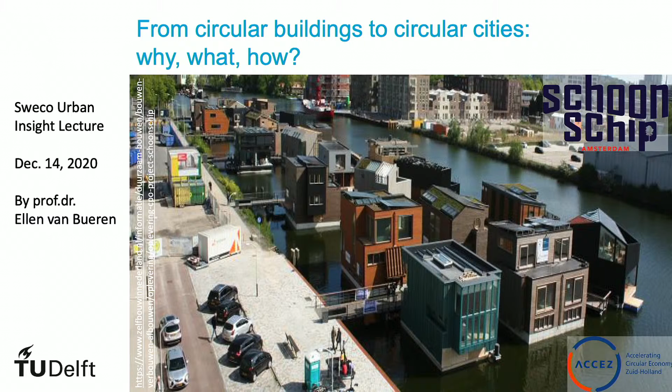Well, this is a very nice example, and I would urge you to look the project up at the website, where they have much more information on it. It is a very nice example of how you can make cities more circular from a very bottom-up level as well, and to see what it could offer to us. So it's not just the buildings, but also the community involved. But let me take you through the slides and see where we get this hour.

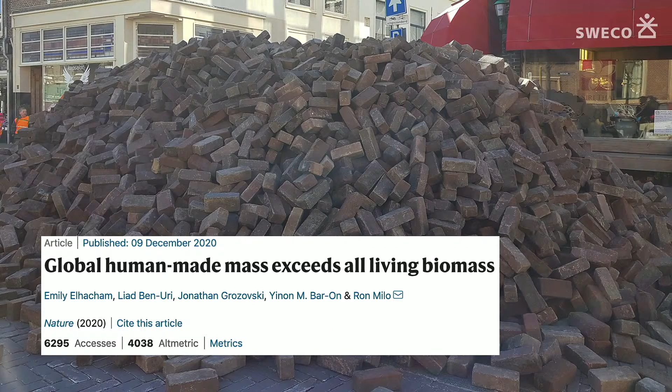I will tell you more first about why. Why do we need to develop our cities in a circular way? Well, I guess the Sweco report also mentioned it already, and I think climate change is happening all around us. I guess you're quite familiar with the reasons why we need to become circular. But nevertheless, I want to share with you this recent publication of last week, stating that global human-made mass exceeds all living biomass.

Another fact made by humankind, another milestone achieved, you could say. And it's really incredible all the materials that we extract from our earth and that we produce, and that we perhaps also do not use in the most sustainable and responsible way. After all, we only have one planet, and we should be careful with the planet, with the resources that are there and the living climate that we need as humankind.

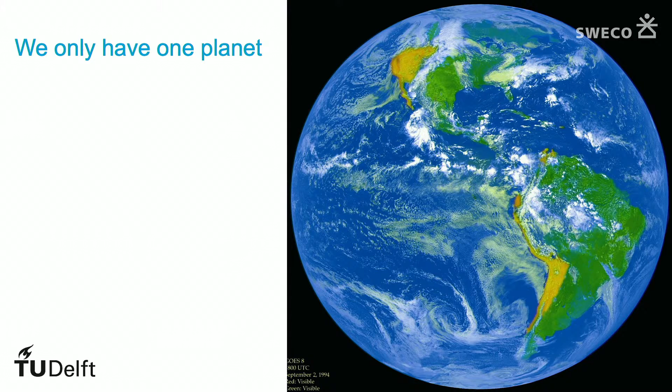Cities are of particular interest to people, policymakers, companies interested in making our planet more sustainable, because they are sources and sinks of pollution, of material use. By developing cities you need a lot of materials, but also for the operation and maintenance, of course, you need a lot of materials and resources as well.

At the same time, they are huge sinks of material use, since lots of the materials that we extracted and manufactured and produced into building products and buildings and infrastructures are stored in there. So whatever we have used, you could consider it as a sink, as a potential mine of the future as well, perhaps for reuse.

There was also this briefing by the European Environment Agency on construction and demolition waste. It is one of the biggest waste producing sectors as well. So we need to be really careful about what we use and whether we just dispose of it when we

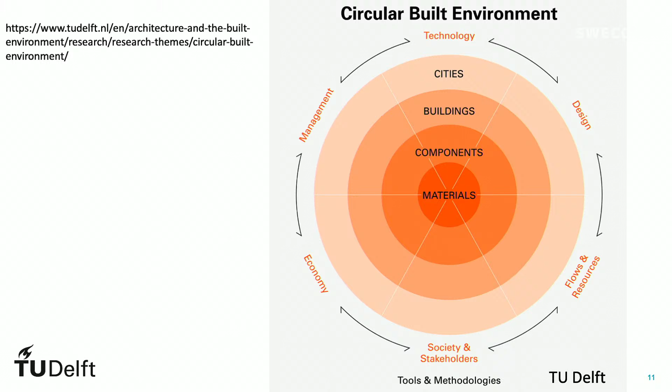But what makes it so complex? Because this graph, even though it has many components, it seems quite accessible. But if you dive into it in more detail, then you see that closing loops at higher scales is more complex than at lower scales. There will be more actors involved, the definitions become more vague, more ambiguous, and it will be more challenging to see what is a good measure to take, how to really make sure that I close the loop.

And then you come to questions: okay, on what level should I close it? Should it be on the material level, and that material, should it be embodied already in a product, or what if it's embodied in a building? Should I then try to save and reuse the building at all costs, or should I do it at the component level? So those kind of questions become apparent then.

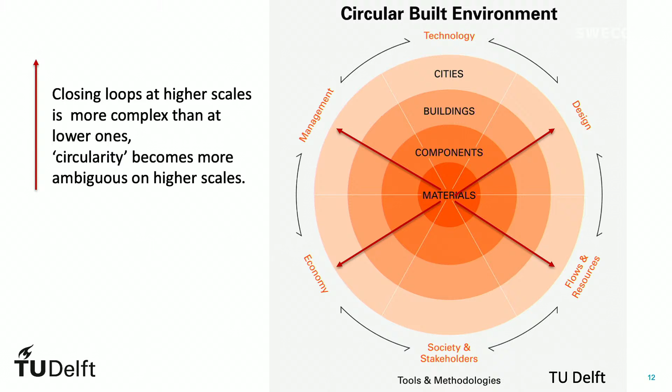And then you also see that the higher up the scale you go, the more and more actors will be involved, coming from different sectors and coming from the public and the private sector as well. So it will be a very difficult setting to organize and coordinate, and such coordination mechanisms are usually absent.

So now when we think of, well, why is it so challenging to have this circular built environment, even though it sounds so logical? Then there are two fundamentally different approaches to circularity that we can identify at the moment. And it is important to understand these different approaches, because there are two different discourses, all preferring different solutions.

And that is also one of the messages I want to give to you in this lecture: having the debate about how these different approaches match and can fit into each other is something that is very important to learn about together, because there are no known solutions yet, but together we should try and come to solutions. But I'll introduce these different approaches to circularity.

On my slide, on the left-hand side, you see there is one approach that is about the closing of resource loops, and it is especially focused on supply chains, and supply chains have become, in our last century, footloose. So it is especially about cleaning and greening supply chains and making them more efficient and closing the loop at that level. And then you really think in terms of products and services that come along that help to close this loop.

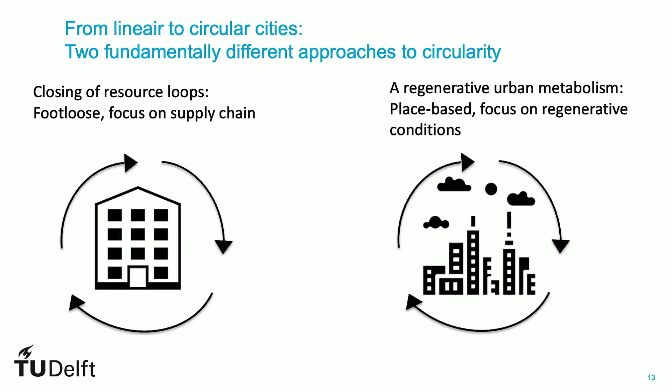And that focuses really on the regenerative conditions of cities. So how can you make sure that a city can sustain itself in the future? How can it reproduce itself as well? Grow back material sources, for example. And that is a more place-based understanding of circularity. And this place-based understanding makes that you will have different requirements or different preferences, so to say, on what level of scale you want to close the loops.

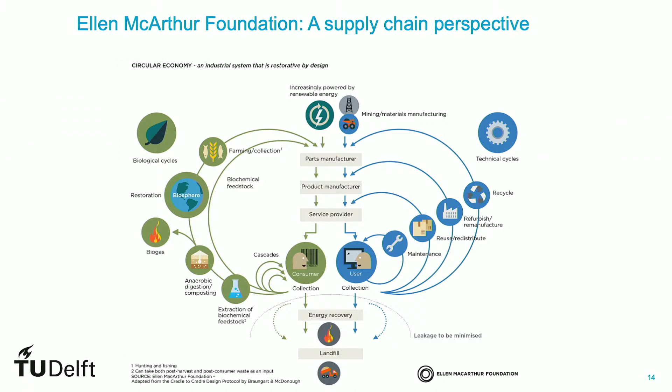But I will go into each of these two approaches, and then we will see what are the advantages and disadvantages of each and where could they fit into each other. So the supply chain perspective, that is a perspective that is especially promoted by the Ellen MacArthur Foundation, a foundation that really pushed the term of circular economy, and I'm sure most of you must have heard of this initiative and the wonderful work they've done thus far and are still doing.

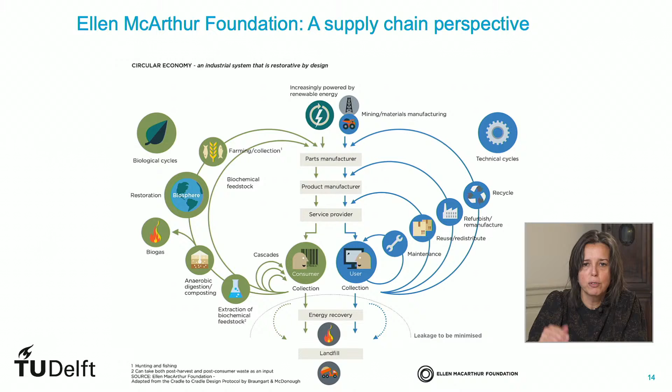And this is a picture of the butterfly diagram, they call it, of how to close the biological cycles and the material cycles in the world. And here you see again the different levels of scale at which you might want to close these loops.

Also in the Netherlands, we have been following the Ellen MacArthur Foundation closely and the initiatives, and it has brought up a debate and policy ambitions and goals emphasized by national government that we should become completely circular by the year 2050. And for the building sector, it popped up the question, okay, how will we be doing that? And one of the questions was also, well, how could we define or how could we frame circular building or a circular built environment?

And I had the pleasure to be part of an action team, it was called, of sector-wide participants of the construction and building sector, acting on all different kinds of levels. And they have come up with a definition of circular building, and it says that it is concerned with the development, use and reuse of buildings, areas and infrastructures without unnecessarily exhausting natural resources, polluting the living environment and negatively impacting ecosystems, and building in an ecologically and economically responsible way that contributes to the well-being of humans and animals, now and in the future, here and in other places.

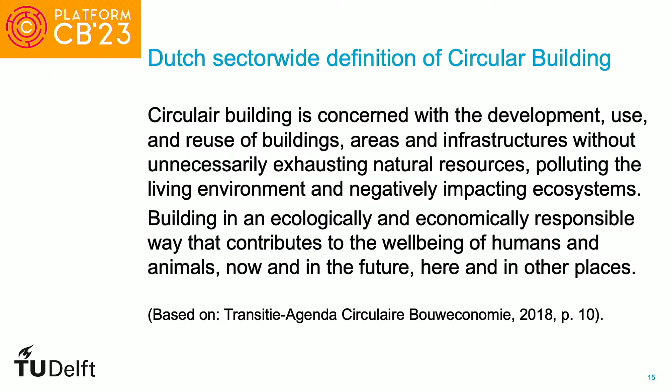So a mouthful, of course, inspired by many other definitions that go around. And I must say, there are many definitions that you can give of these concepts. I think the most important thing is that you find a definition that works, that is inspiring, that sets criteria for measuring progress, etc., or that you can use as a basis for further operationalization and taking action. And this is just one of the many examples of how we in the Netherlands have tackled this definition problem.

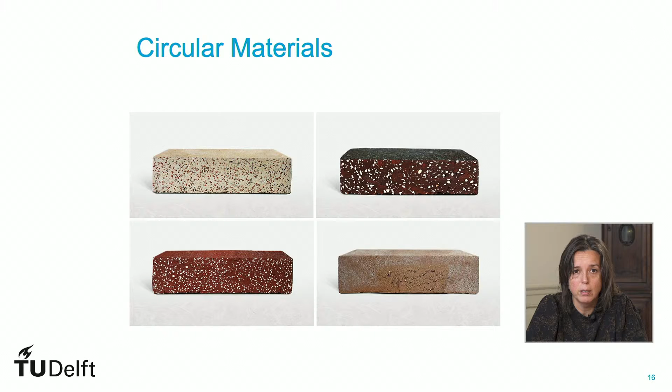But of course now the question is, okay, how to take action then? And I will now take you through some examples of circular actions and innovations that have taken place at various levels in the built environment. The first one is on the level of materials. Here you see stones of the Stone Cycling company, which recycled stones that have been used in housing, building production, and can now be reused in a new shape.

Besides innovating on a material level, there are innovations possible, of course, on the level of the building components. And you can think of the carpeting and flooring, which is more connected to the interior side of buildings. But you can also think of circular kitchens, and you see a picture of that also on the slide. Kitchens are sometimes replaced in a quick way, but you can also think of, well, how to replace parts of it, or how to replace it in such a way that it can be remanufactured and reused next time.

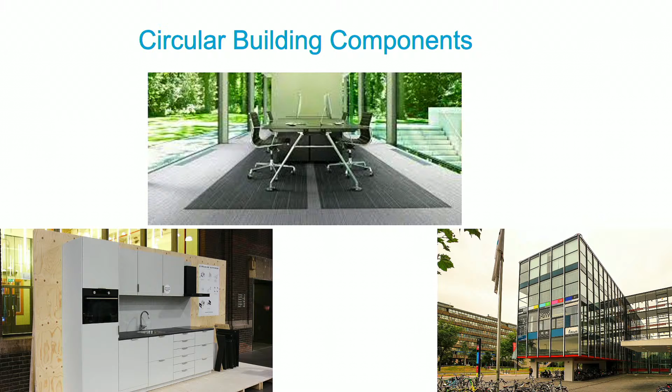And at another level of scale, again, you see there one of our faculties as well at TU Delft. It's an example of an experiment of perhaps trying to reuse the facade. And this is a facade with all the high technology needed for operating the building systems included in there. And the idea is, if you concentrate it in one place, then you might perhaps also come up with a business model for this facade. So you can lease it, and you can always make sure that you have the most up-to-date and also often more energy efficient, more resource efficient technologies available.

Well, these are some of the ideas that we have come across in the Netherlands in innovating for circular materials and circular buildings. And one of the principles that is key to that is that you start from the design perspective. And a very popular way of communicating this message is by using the figure coined by Stewart Brand, with the different building layers.

And design for adaptation and reuse requires the arrangement of layers to allow for maximum adaptability. So if you take the lifespan of the different layers into consideration in your design, you could already think of, well, what if I want to replace a certain product? Or what if I want to repair new piping or wiring? What if I want to install a new climate system in my building? How should I get access to it? And so how should it all be fit together in order to make it easily maintainable, easily reusable, and demountable as well?

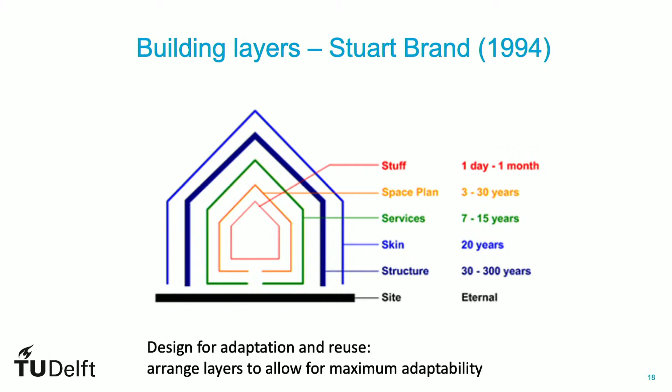And this is, of course, also not a new idea, but now with this circular economy aspect, it ties together the thoughts we have already developed in the past centuries sometimes on what a sustainable or a good building should look like, and how we can now organize and design it accordingly as well.

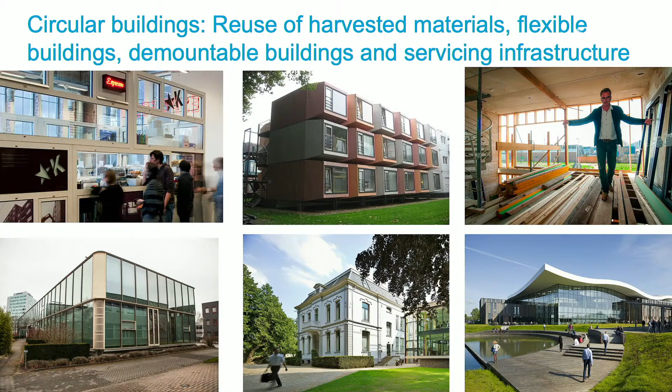Some other examples of circular buildings. Well, you can think of reusing materials of a demolished building. As you can see on the picture in the left-hand corner, it's our coffee corner at our faculty from old window frames of a demolished building. But you can think of containers being used and designed as student living places. You can think of the reuse of a whole building by stripping it down and then rebuilding it, using as much as the materials that became available of it.

On the bottom left, you see another type of demountable buildings that was designed more than 20 years ago. And the idea was that the technical lifespan would be in line with the economic lifespan, and so it would only last for 20 years. But it is still very popular, and it has been rented out for the next 10 years as well. So the economic lifespan and the technical lifespan have been prolonged for another 10 years, but it is completely demountable as well, and made of as much renewable or reusable materials as possible.

Another two examples you see are of a new community house built in a circular way with all the products listed there, with a whole system listing what kind of materials are in there, who owns it, and how to take them apart and how to reuse them.

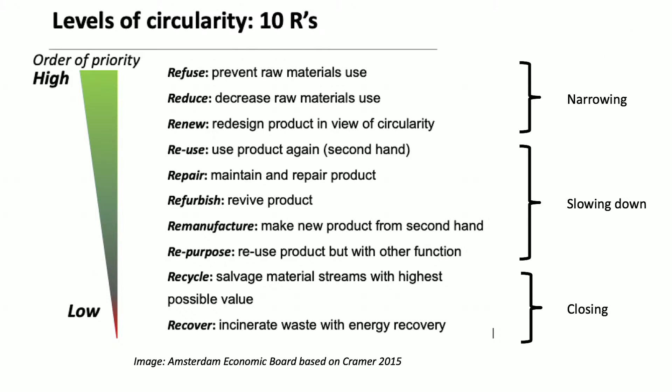The first ones are about reducing and narrowing the amounts of materials that are being used. Another pair of R's are about slowing down the speed by which it is being used and goes through the life cycle. So once it is in the system, try to keep it there as long as possible. And the lower R's are about what to do when we no longer need it and can no longer use it in a higher quality way; then we might recycle it or recover it.

All that I've just told you are still examples and innovations and policies that have been developed from this closed loop focus: the importance of closing loops and closing supply chains and product chains. There are some advantages to this focus because it's unambiguous.

Lots is about measuring existing methods that we have, like life cycle analysis. We can use it, material flow analysis. We can use it to estimate and assess the materials that are being used, go in and out. What can we recover, reuse, etc. So there is already quite some knowledge and tools that we can fall back on to make this happen.

It also leads to progress, to nice results, to showcases even that show the sector but also the wider public that it is possible that this circular economy, even though it sounds a far-fetched goal, it is possible to get there and to make it happen.

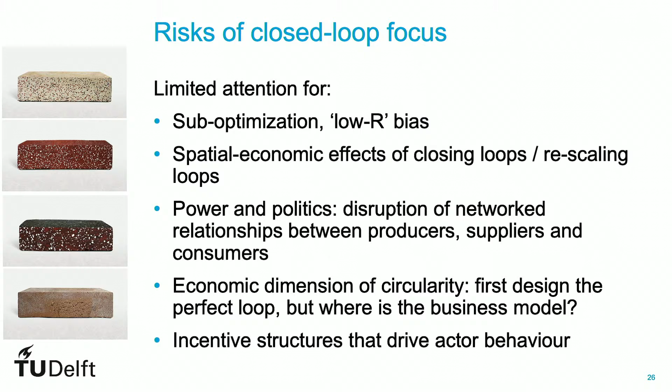And a city needs a lot of input, materials, resources to function. And you could consider the city like a human body which has a metabolism, which needs resources to live and operate. You can consider a city in the same way. And it needs organic, biological resources and materials, and energy and water, etc.

And you need to make sure, also on an urban level, to think of, well, how to best close those loops. But then, of course, you come perhaps to a different preference of scales to close the loop than you might come to from purely a supply chain point of view.

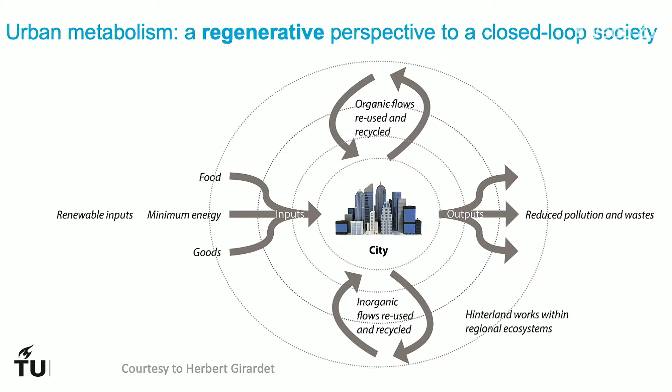So, for example, a city might want to think, well, we think it is important that we use and reuse all the materials that we waste in a responsible way, and we want to reuse them in the proximity as much as possible to avoid transport with all the losses and the emissions that come along as well. So that is also another way of looking at this circularity.

There are, of course, many definitions again on how to conceptualize circular cities. And I'm not going to give you any at this moment, but I just want to share some examples with you, which will inspire you, set your mind to work, and think of, well, how can I contribute in my work to these circularity ambitions on an urban level as well? There are many definitions around, so please take a look at those.

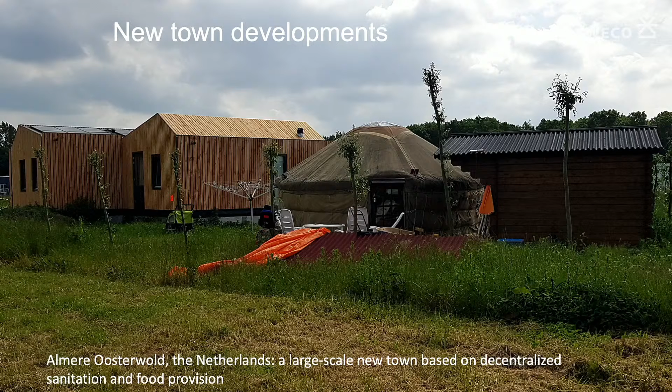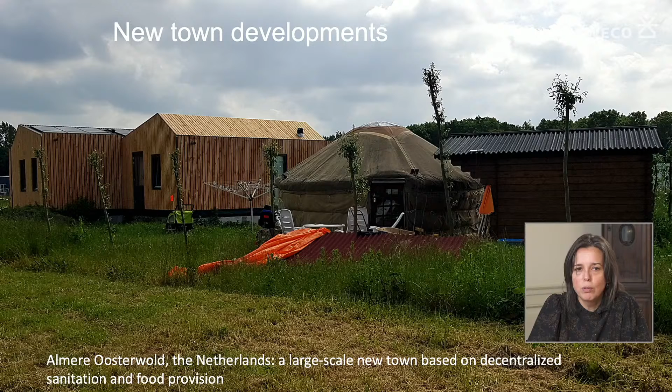There are some new town developments that can be very inspiring. This is one in the Netherlands where, it's a bit of a love it or hate it example, but there's a large-scale new town based on decentralized sanitation and food provision, and we will have to see how it will work out in the future. There are many other aspects to consider here as well besides circularity, but it is a very interesting experiment to learn from, and you see that developing a whole district based on certain principles of circularity might give rise to a whole new concept of living together in an environment.

Another example is the Darwin project in Bordeaux, in France. It is a transformation of an urban district, and it has been developed based on an understanding of the ecological opportunities of that particular area, but also of the ecological constraints. So in making the redesign of this area and all the activities that could take place there in the field of living and working, these ecological considerations played a key role in making the program and what could be developed there.

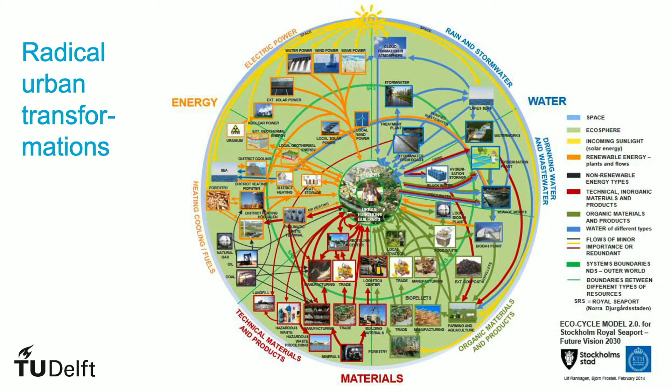Another example well known to Sweco is the Stockholm Royal Seaport, where the port district has been transformed into a multifunctional area, and an analysis has been made prior to the development of this area of the different resources and flows that should be part of this area. And so by making this whole analysis prior to the development, a whole circular district could be developed in which not just the material flows but also the water flows and the energy flows have all been connected, and this has given rise to a truly integrative development of this area.

Adapting urban areas is another challenge, which should be on our mind as well, because most of our cities are already there, even though we are developing a lot as well, but especially in the bit older societies or parts of the world, parts with less growth, we have to adapt our existing urban areas to these circularity demands.

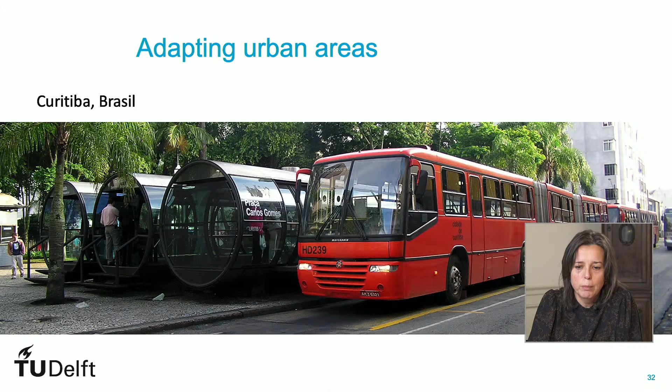And this is a very old example already, but I still very much like it. In the 1970s, I think, or 1980s, the mayor of Curitiba in Brazil started to develop a circular city concept, even though it wasn't mentioned as such back then. But besides having this famous bus system developed, there were other aspects to it as well. There was a waste management system created with separate waste collection, which offered jobs to unemployed and poor people, often also people who had been in prison or had been disadvantaged in life. So this created jobs as well.

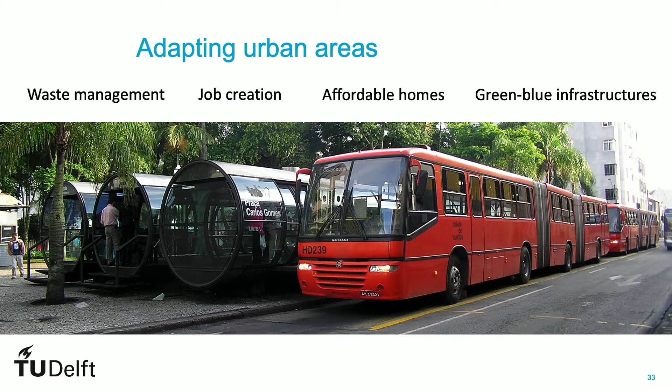There were also programs on creating affordable homes by relocating favelas that were flooded on a yearly basis to safer, drier places. And at the same time, this offered the opportunity and the space to make green-blue infrastructures, which would make the city more resilient as well. So this is an example of a truly integrative perspective of adapting the city.

Now, from an area-based point of view, what we tend to do now in many cases in Europe, but also in some other places in the world, is that we make these Sankey diagrams. It's based on an input-output analysis of the flows of an area going in and out, looking at the purposes for which they are being used, and then see, well, where are the leaks and where can we find potential closures, and then start to design for it.

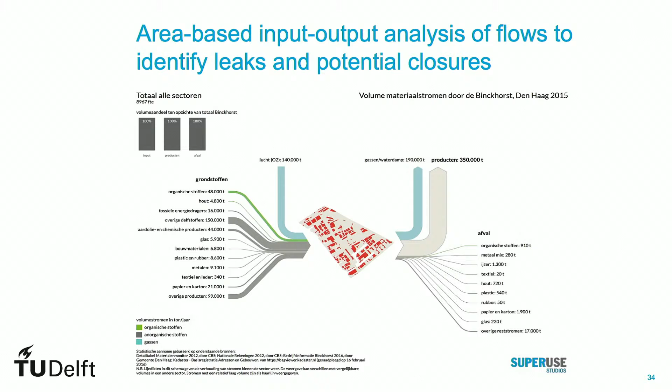This is again a bit of a technical perspective that might come up with good solutions, but in preparing these solutions, it is also important to not close the eye for other initiatives that are already happening in many cases in these cities, which might be on a lower level of scale, which you perhaps cannot identify so easily when looking at the city in such a schematic way.

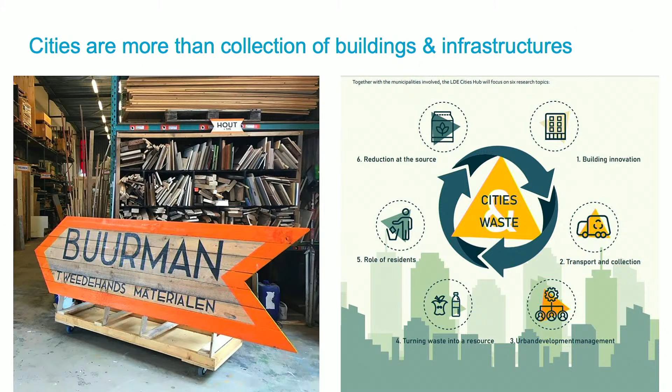And so here you see an example of a second-hand material shop that has been created on a very low scale level. Especially when big companies start to interfere, when big redevelopment or transformation programs start to happen in an urban area, then the question is, well, is there still a place for these kinds of initiatives, and how to fit them into the bigger picture that you want to develop? And that is very important also for the public support of the whole circularity transition.

Well, and this is also what I would like to say with this picture, with the participatory approaches that are being used more and more as well. You should also, in your designs of urban areas, give freedom for people participating and stakeholders participating to develop their own initiatives. So there should also be space allowed to accommodate these initiatives.

And then we come to the challenges to address here: cities and regions need to plan for the circular economy, and especially the use of land is very crucial for a circular economy, because if you want to collect materials, if you want to rework them, remanufacture them, you need particular industries, you need space for it.

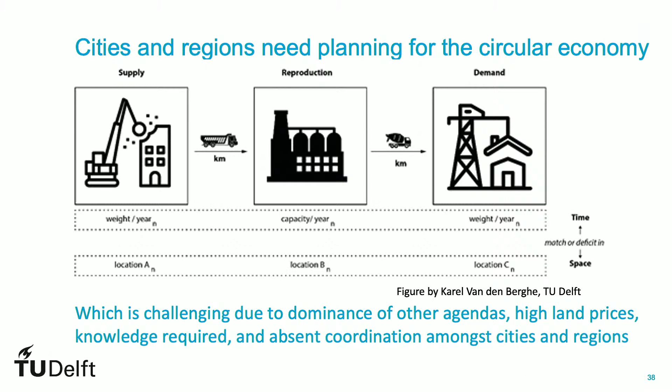And if the land price is such, or if the need for housing is such, that you allocate the land for other functions than this circular economy, then the question is, well, where will it take place? And then you might come to long travel distances with all sorts of negative effects as well. So again, it's a question of the level at which you want to close the loops.

And one of the first questions we should all ask ourselves is how to make reuse and waste reduction really affordable, and how do we make it pay, as the circular economy concept promises us. And as long as we don't change certain rules of the game we live by, we operate by, then it is very difficult to make this society-wide transition.

Another thing we should do is focus on a higher value recovery, and also policies, whether they are public or private, should focus on stimulating or demanding value recovery at a higher level.